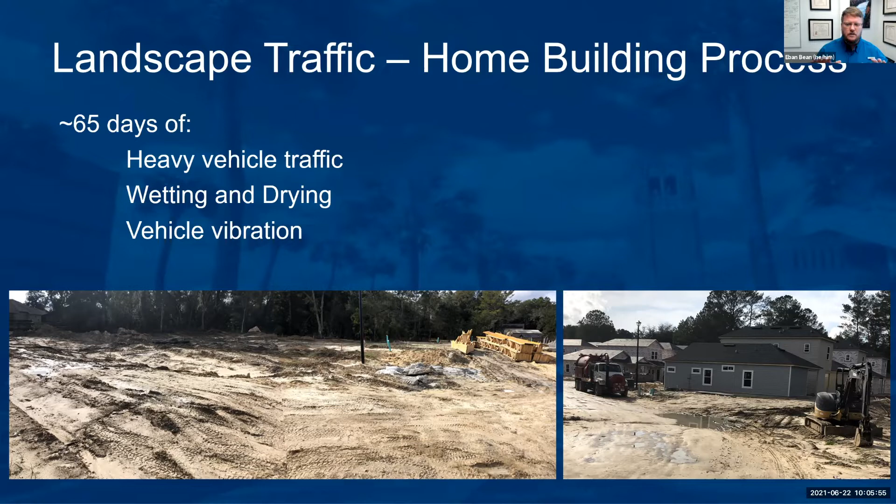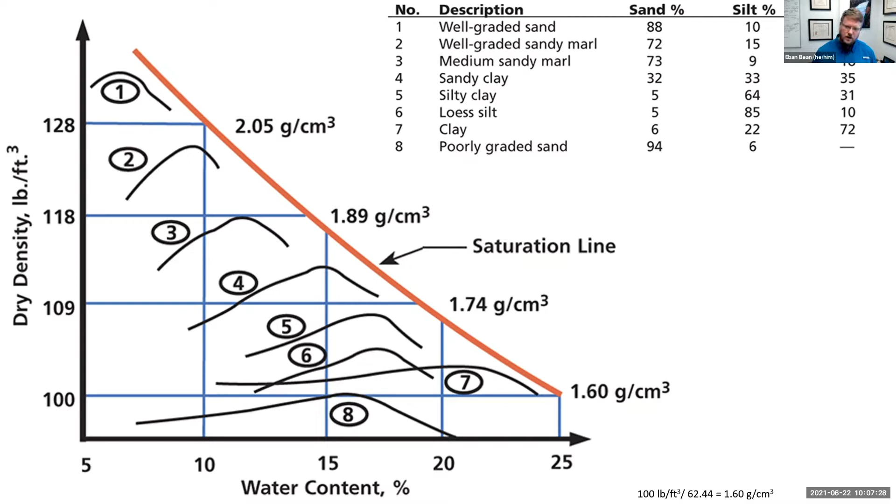any further. So if we wanted to optimize the compaction, we would want to wet and dry, and load and unload this, basically put a compaction force on it as it's going through this wetting and drying cycle. This is essentially what's happening in our landscapes, but it's also what you want to do if you wanted to stabilize a roadbed or do a structural foundation. But it's not the best for trying to grow vegetation in landscape.

So with soil compaction, there's a couple of processes that are affected. Number one, we have less infiltration. When we compress those particles together, we reduce the amount of space in between those particles that water can infiltrate the soil, and that air can move through the soil. So it makes it a lot slower for water to soak into the soil. This generates more runoff, and we've probably all seen the impacts of urban runoff, particularly with nutrients on our waterways here in Florida.

But it has other effects. Some of the main ones are how it directly affects the vegetation that's trying to establish in this soil. The roots of a plant will naturally push into that soil and then die back each year seasonally, and leave these old root channels that water and air can move through. And they'll put more roots down each year. So gradually over time, it will mitigate this soil compaction.

However, the soil can be so compact in many cases that it prevents the roots from actually penetrating into the soil and sinking those roots down. So we end up with a fairly shallow root zone, and you may have even seen the carpeting effect that occurs every once in a while. This vegetation is less drought tolerant, more sensitive to pests and other types of stress, and can't go as long without watering in between. It's more dependent on irrigation.

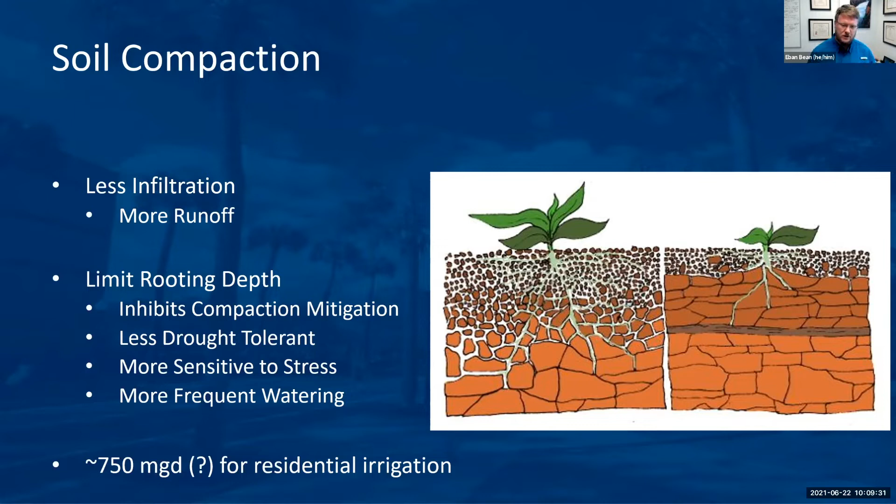In the state of Florida, we're talking somewhere around 750 million gallons per day go to residential irrigation. That's a lot of water each day. So one of the sites that we've worked in quite a bit is not too far from you in Hernando County. We're over in Marion County, at On Top of the World. A lot of the soils we're dealing with here are Candler fine sands, and I think that's pretty common in Hernando County as well. So a lot of what we have here at On Top of the World probably applies to what you have in Hernando County.

So this is an active adult community. They have about 6,000 homes currently, but a projected build out of about 30,000 homes. And they're within Swiftmud, the Southwest Florida Water Management District, just as you are. The average water usage is about 250 gallons per home per day. But On Top of the World wanted to be good stewards, reduce their water consumption, so they reduced their permit to 150 gallons per home per day.

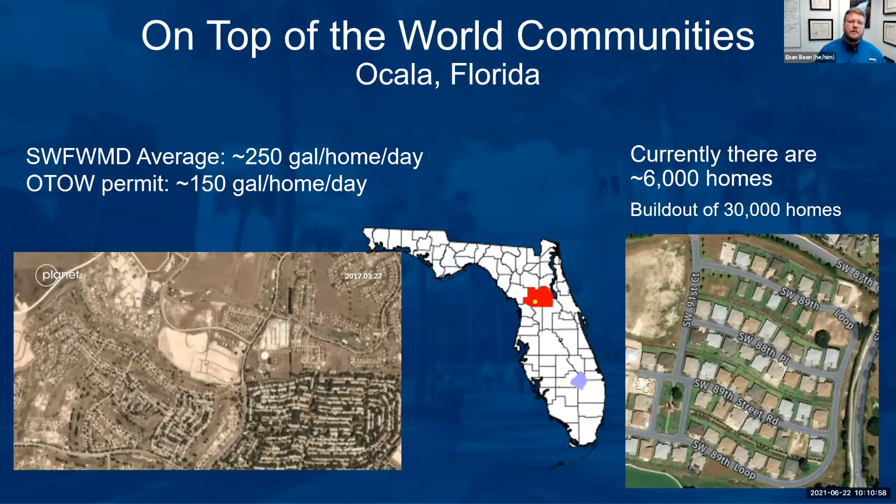They got down to about 190 gallons per home per day, and then brought us in to explore other ways they could conserve water. They had tapped out all the indoor efficiencies, and had gone with only 60% turf in the landscape, but still weren't hitting that 150 gallons per home per day. So this is the first study I want to walk you through real quick.

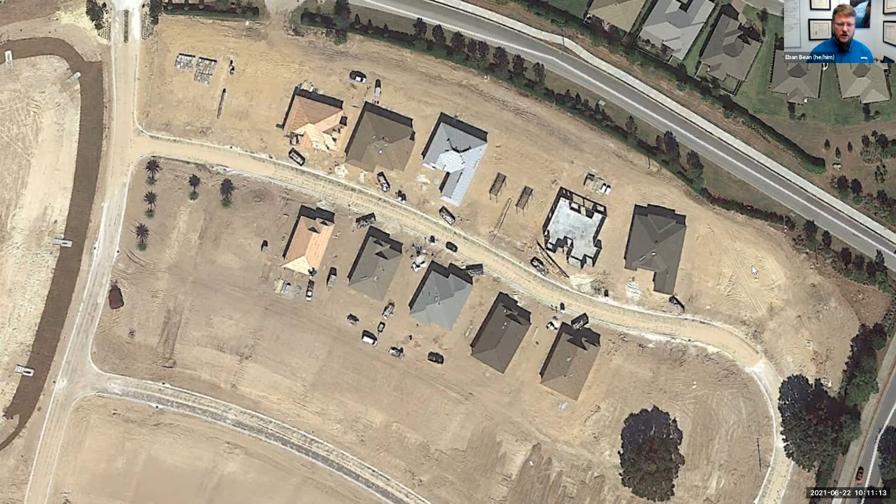This is 10 model homes that we have here, and this is the one that is not going to be included in the study. But essentially, we use 9 of those homes. In 3 of them, we left that soil compacted, just like it would be if a contractor came in, built the home, and then sodded it, just like any other home. In 3 of them, we took a product that you may be familiar with called Comand.

It's an organic compost, and we put down about an inch depth, and then incorporated that into the top 6 inches. This was just before the irrigation lines went in, and the day before they laid down the sod and put in the landscaping. In this case, we used Empire Zoysia, and in some other studies I'll show you, we're using St. Augustine. So just know we're looking at several different types of turf here.

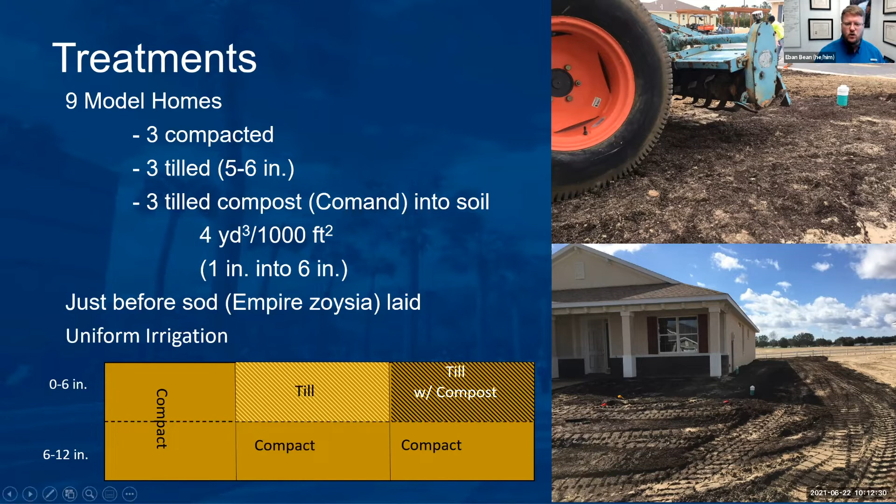And then we also wanted to know, looking at how the soils improve, what kind of benefit we got from just tilling the soil. So if we didn't include the compost, we didn't have to manage another material on site. If we can just get away with tilling the soil, that would be a real benefit to getting this to translate into practice. So we basically incorporated into the top 6 inches of that soil on 3 of the homes and so forth.

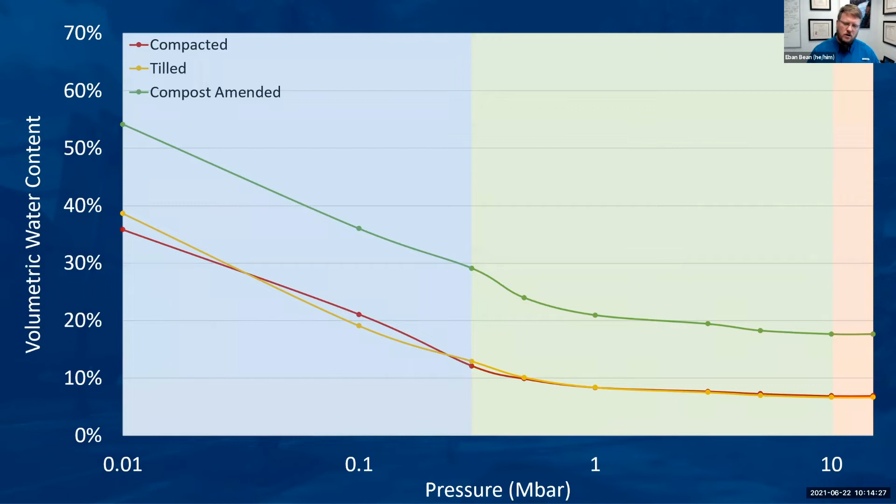At the other end, if you tried to squeeze all that water out, you're going to get most of it out, but there's some amount of water that you can't squeeze out of the sponge. Similarly, there's an amount of water that plants just can't pull out of the soil. This is unavailable to the plant, so this is our permanent wilting point. But what's available to the plant for a longer period is what is in this green zone. I'm going to show it to you more in percentages or fractions of the volumes here.

The key that we found several times throughout this 2-year study was that the control compacted soil and the tilled soil essentially had the same physical properties. The way they held water and interacted with water didn't really change. I was a little surprised by this, but sand doesn't really hold a lot of structure. A clay, you can form and mold, it'll hold structure. So when you till that sand up, put sod on it, water it down, and give it a little bit of time, it's going to eventually settle back down and recompact to its pre-compact state.

Well, by incorporating the compost, what we found is that it holds that structure better, incorporates a lot more porosity or volume for water and air to exchange through the soil, and was able to hold twice as much water as the unamended soils.

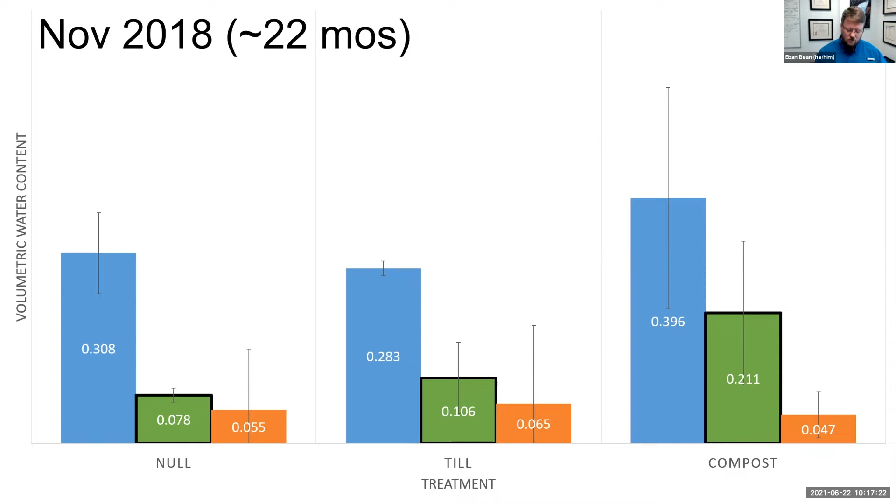Keep in mind, this is a model home area of a development. It's just like the real world without homeowners. It's my favorite research site that I've ever had. But basically, I didn't want to do anything that would stress the grass or cause the lawns to fail. All right, so with this doubling of the plant available water, hopefully you can pick out which ones are the amended lots.

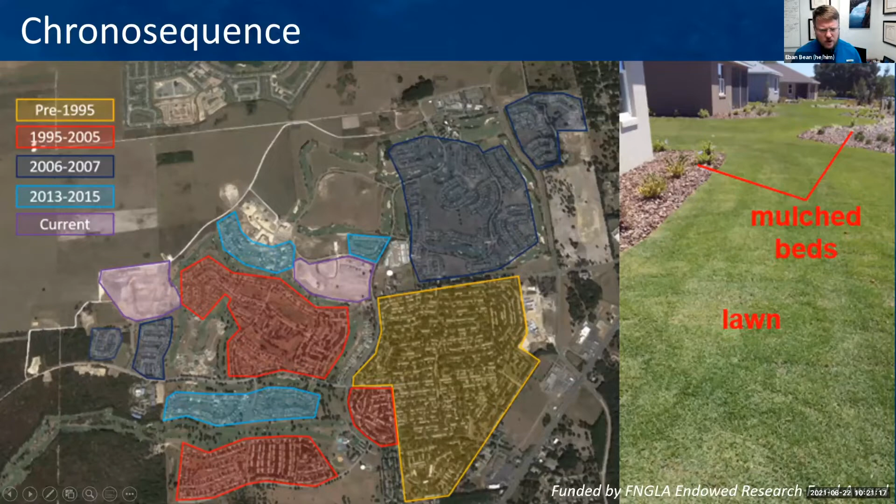And we looked at the soil characteristics, several of them in the mulch bed and the lawns. And it was really interesting what we were able to see. And I'm just going to show you the bulk density here, because there was a lot of data, but I want to move on and hit some other things. First of all, you see that we have the beds and the lawns.

So it's interesting that it takes 30 years of vegetation loosening that soil and developing that soil. But we do get back to a quasi pre-compacted soil bulk density, at least in the top 6 inches. But a couple of things as well to point out. Number one, our 6 to 12 inches stays pretty high. And it takes several decades to really mitigate this on its own.

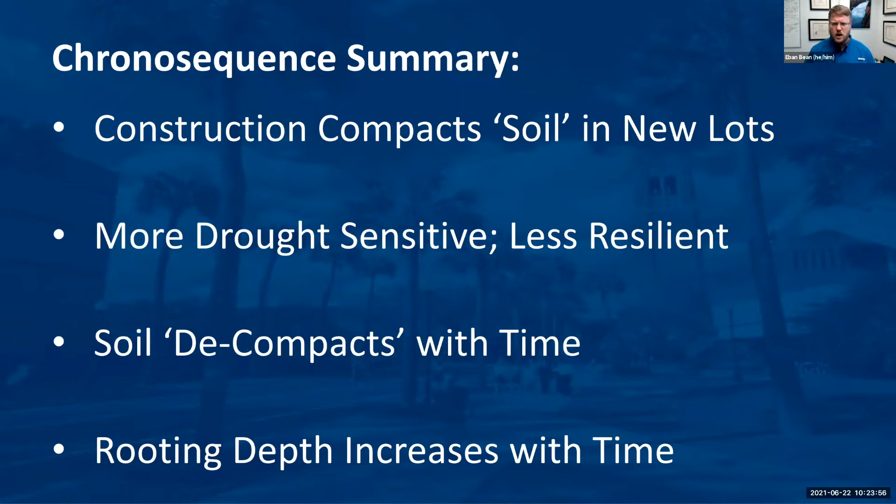We do get this compaction mitigation process that occurs over time, and the rooting depth does increase with time. So we also looked at how far we could push down a probe at different age soils. It does increase over time, but the time frame for these processes to occur is on the order of 2 to 3 decades. Okay, so a long time for that to establish.

All right, so we had some good results from there, and this set the stage to look at, okay, how is this actually going to work in the real world with soil amendments and compost? With the model homes, we didn't have homeowners to come in and do things the way they want to and change things. So in this phase of the study, we looked at a real world scenario. And so we had 24 homes.

7 of them were compost amended, same type of application, basically 1 inch into the top 6 inches, or 4 cubic yards per 1,000 square feet. And we had 8 sites that were tilled down to 6 inches, no compost, and then 9 that were controls, basically left compacted. And then we applied these treatments just before the landscaping went in, just before the irrigation went in. And then we started monitoring this in July of 2018 through October of 2020.

One thing I want to mention, though, is that each of these homes had a Hydrawise irrigation controller. What we asked each of the homeowners to do at the beginning of this study was to reduce their irrigation runtimes by 25%. They were pretty standard, basically all set at 45 minutes for their lawn irrigation. Reducing it by 25% took it down to, I believe, somewhere in that 33 to 35 minute runtime, with the caveat that they could at any point return to their full runtime if they thought their turfgrass needed it.

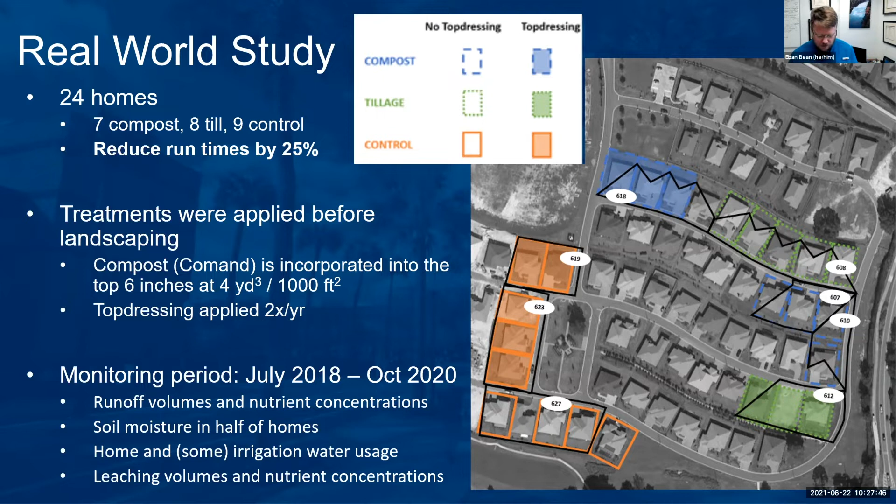We also collected leaching volumes and nutrient concentrations. So if we pair this with the runoff, this is really getting at, okay, we incorporate compost into the soil. Compost is sort of the very first slow release fertilizer, if you think about it. So we are incorporating nutrients and introducing those in the landscape. Are we having an unintended consequence of amending those soils by potentially releasing nutrients into runoff or into leachate? So we wanted to look at that as well.

So looking at the summary over 2 years, what did we see from homeowners with the changes to their irrigation? Keep in mind, we asked them to reduce their runtime by 25%, so to drop down to 75% of the initial runtime. In the control or the compacted lots, we had 6 homes that we had data on. 3 of them stayed at the 75% runtime. 1 returned their home's runtime back to 100%, and 2 increased the runtime above 100%, or above the 45-minute runtime for their lawns.

With the tilled lots, we did see a little bit of a benefit. 2 actually decreased their runtimes below 75%, so below 33 minutes. 2 stayed at the 25% reduction, and then 1 returned it back to the 45-minute, 100% runtime. But with the compost amended soils, we had 3 that decreased their irrigation by about 55%, so down to around 20 minutes of runtime. And there was only 1 lot that returned their irrigation back to 100%.

And there's some people out there, the old adage is you can lead a horse to water, but you can't make him drink. This guy, great guy, but he wanted to have the best looking lawn. So he was going to use all the water that he was allowed or recommended to use. And none of these homeowners knew what kind of soil they had or what their role was in the study.

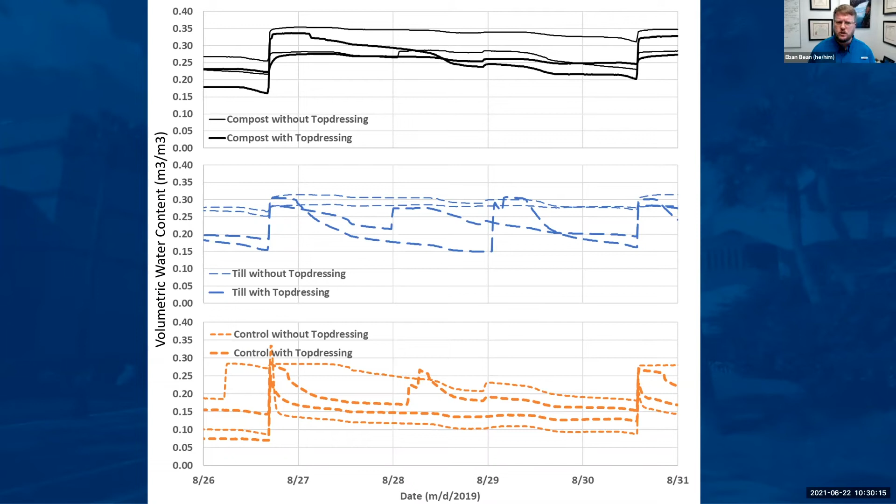What I'm showing you here is the soil moisture over time, and I want to show some differences that we see with the composted soils, the tilled, and the control or compacted. What you should see up here is that our composted soils stay high after this rain event. All of the soil moisture sensors tick up at the same time. This is not staggered like irrigation would be, so this is indicative of a rain event. It saturated the soils, and it holds on to that water for a pretty long time.

We did see that 2 of the tilled lots actually did as well, but they weren't the ones getting top dressing. And I haven't mentioned much about top dressing in this study because it was inconclusive. So we don't have great data that supports what the expected benefits of top dressing can be from a water conservation perspective yet.

And then we have the controls here, and what you see with most of these soils is it goes up really quickly and then it drops down really quickly. Again, not holding on to much of that water, it's just kind of draining through if it's getting into that soil, and it's going back down to that baseline pretty quickly.

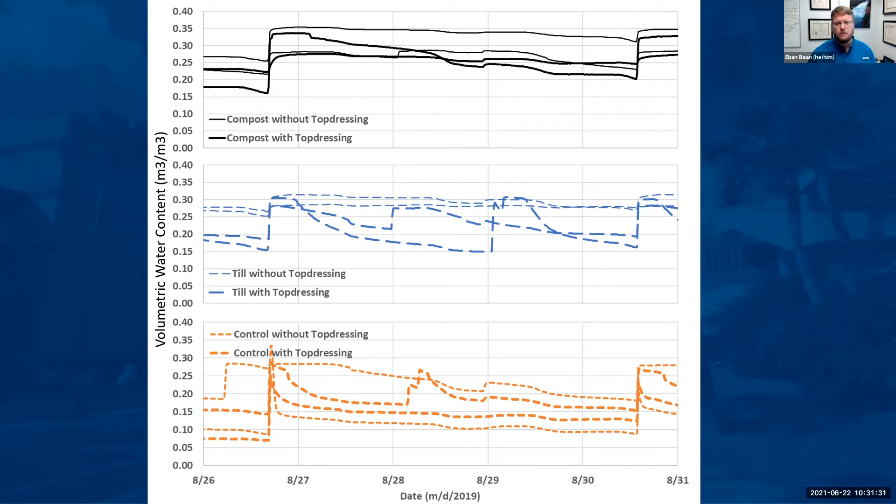All right. So we can even see statistically that our compost had significantly greater water content than our tilled, which was significantly greater than our control. What was sort of strange, and we haven't really figured this out, is that our top dressing, which was basically putting down half a cubic yard twice per year, those lots actually had a lower volumetric water content, slightly, but significantly, than our not top dressed lawns.

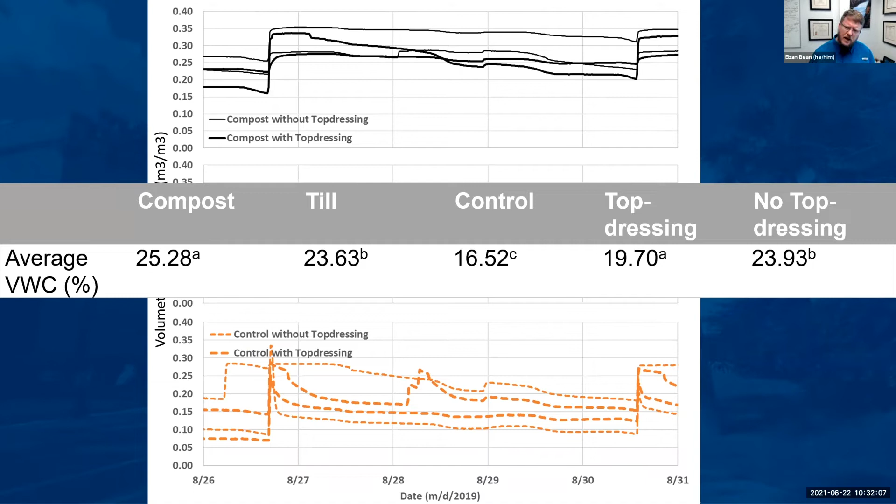Okay, now nitrogen leaching. So this is somewhat interesting. Some of it we don't have a real good feel on. But what I want to start out with is this is looking at basically the total loading of nitrogen that's coming out of the root zone and would end up in the groundwater. In the Springs area, we're particularly interested in trying to reduce that and limit the amount of nitrogen going into that.

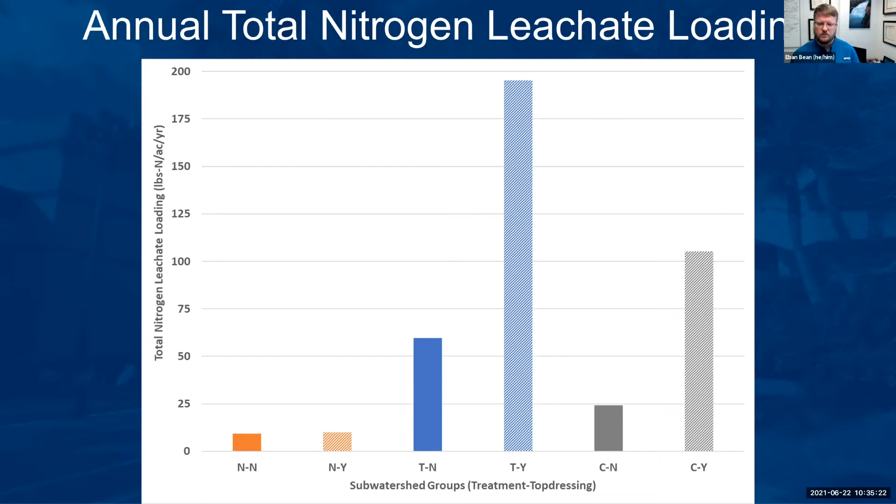Sort of interesting that our tilled had higher loadings than our compost, but we think this is maybe due to just more retention of the nutrients available in the compost amended soil, whereas the tilled soil basically allowed those to flush out. So compost was significantly greater than the compacted soils. So what does this mean? Well, a couple things here.

With runoff, we basically had no significant differences in concentrations or loadings. There were actually lower runoff volumes from the compost amended soils. So there could be some potential crediting or benefit to reducing runoff by amending soils. In the root zone, the composted soil had a higher water availability.

And the homeowners that had this soil actually reduced their irrigation by about 55%, more than what we recommended to them. They reduced it on their own. And even with these reductions from the compost amended lots, we still saw that there was no significant difference in nutrient concentrations, but there was significantly higher nitrogen loading from the compost amended soils.

So this means that this is volume driven because concentrations aren't changing, but the volume is greater from the composted soils. So what that suggests is that even at 25% or 55%, we may be able to reduce the irrigation even further when we have amended the soils.

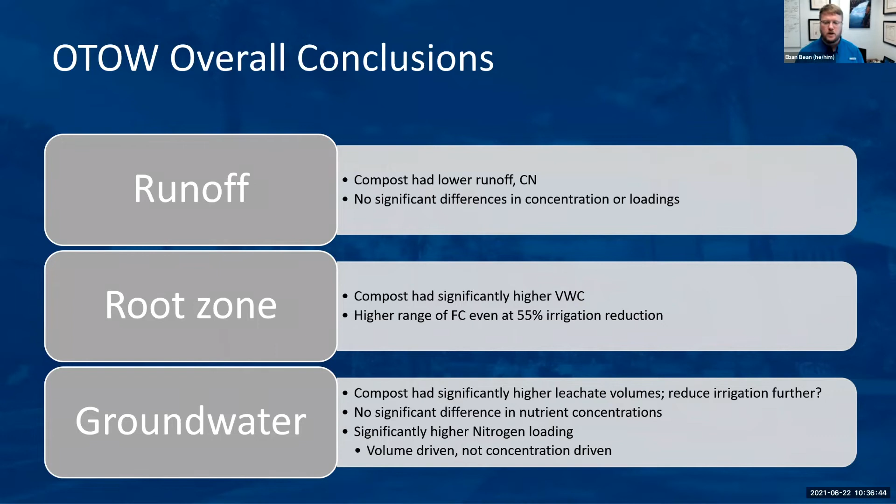So coming out of this study, we still had some remaining questions. One of the main ones here is how much can we actually reduce the irrigation by? Coming out of that homeowner study, 25% reduction seems pretty conservative. The homeowners were happy with their lawns. Several of them pushed it to 55% reduction, and even that seemed to be, from a groundwater perspective, we ought to be able to reduce it even further.

So how much compost is needed to realize these benefits? Right now, the recommended application rate is 4 cubic yards per 1,000 square feet. But what if we reduce that amount to 2 or 1 cubic yard per 1,000 square feet? That would reduce the amount of nutrients that we're introducing that are a part of the compost. So maybe that's something we should look at.

And then, we've done a lot of work with one particular product, and that's been the Command product. Life Soils is a great partner to work with, but as IFAS, I strongly believe that we should be brand agnostic, or basically not endorse any particular product. Our recommendations should be descriptive, meaning we say if the product has these parameters or these qualities, then it should produce this outcome. Do the different brands or different materials produce different results?

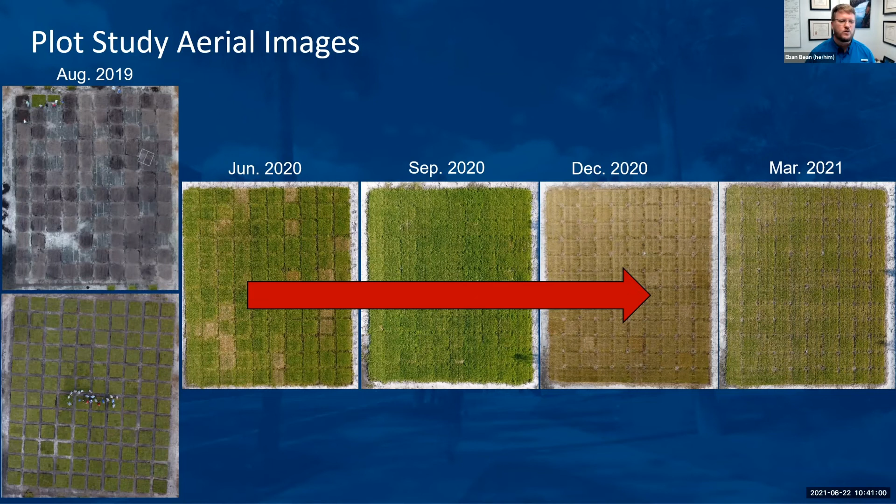So this is the study that we did. We have 2 studies that we looked at here. I'm going to go through this pretty quickly because I just want to get to what the results were here.

But essentially what we wanted to look at here were 3 irrigation rates. Okay, so we used 75% of the IFAS recommendation, the same as that 25% reduction. We used 25% of the IFAS recommendation, which is 75%, and then 50% of the irrigation rate, and then a 0. We had some plots that were not irrigated.

4 amendment treatments. We had a control, and then 3 commercially available products that we just labeled A, B, and C. And then all of these plots were at the high application rate of 4 cubic yards per 1,000 square feet, 4 replicates.

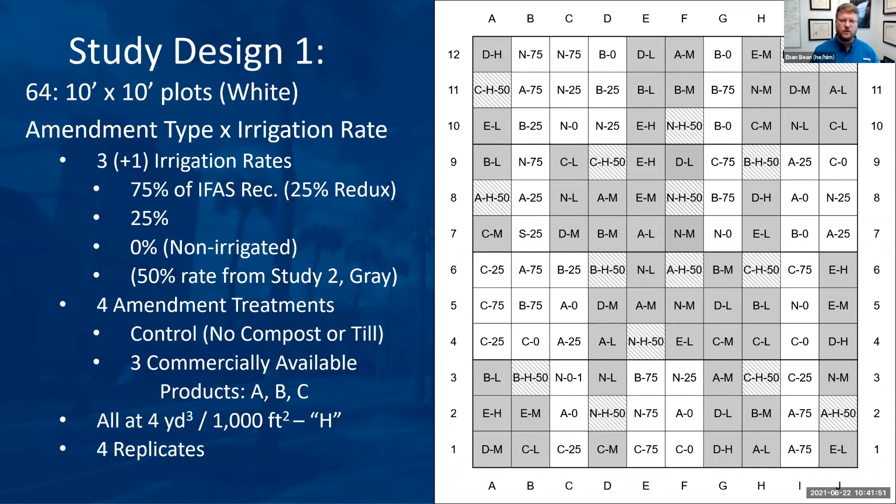So looking at this part of the study, we wanted to collect soil samples and look at different soil characteristics at the beginning and ending of each growing season. What I have today is basically the summary of results from the beginning and ending of the first growing season. We've collected the beginning of the second growing season, but obviously we haven't gone through the full analysis of that, and we haven't gotten to the end of it by any means.

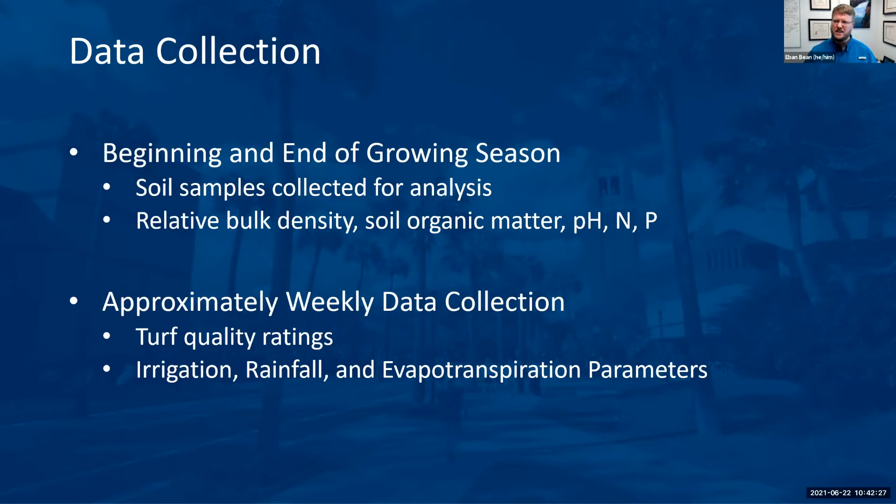In this study, the NTEP, the National Turfgrass Evaluation Program, recommends a 6 as the minimally acceptable. In this study, we went to a 5, just saying that maybe our homeowners, depending on where they're at, may just be a little bit more able to tolerate a little bit lower quality, but we'll see.

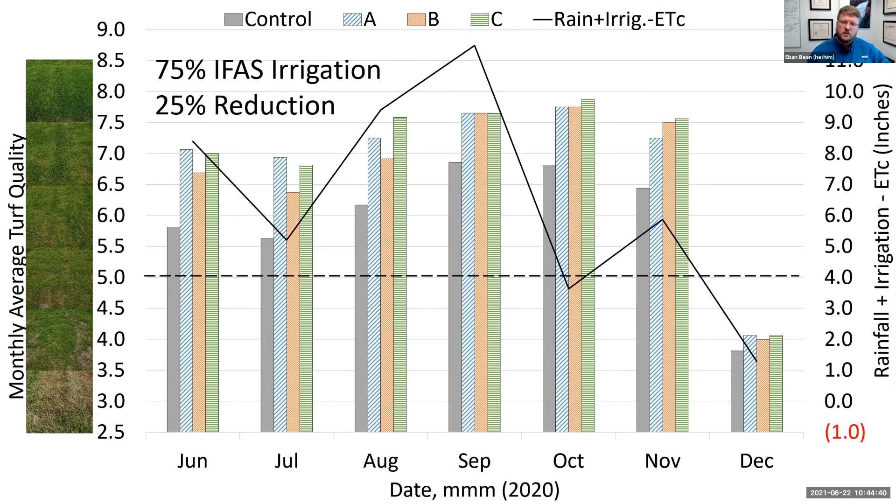Now we're going to half or 50% reduction. And so our turf quality ratings kind of drop down a little bit. What you'll notice though is there's not a whole lot of difference. There's a little bit of difference, about a half a point between the different amendment types. And these are commonly available compost brands. You could probably come up with what these are, or at least some ideas of what they would be.

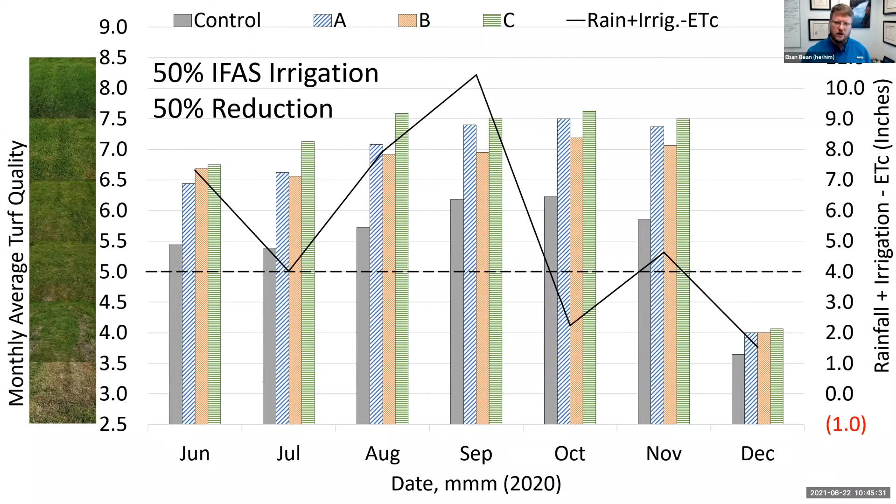Our amendments, again, we're still hanging out about a point and a half higher than the controls, and we see that we basically maintained everything above that acceptable 5 value during the season. And you're going to see this black line of the water balance tick down as we reduce the irrigation further. Getting down, this is 75% reduction in the irrigation.

Okay, and so here we're down to about maybe now half to 3/4 of a point greater than our control plots. Here we're getting much less of a difference because we've got so much rain making up for it.

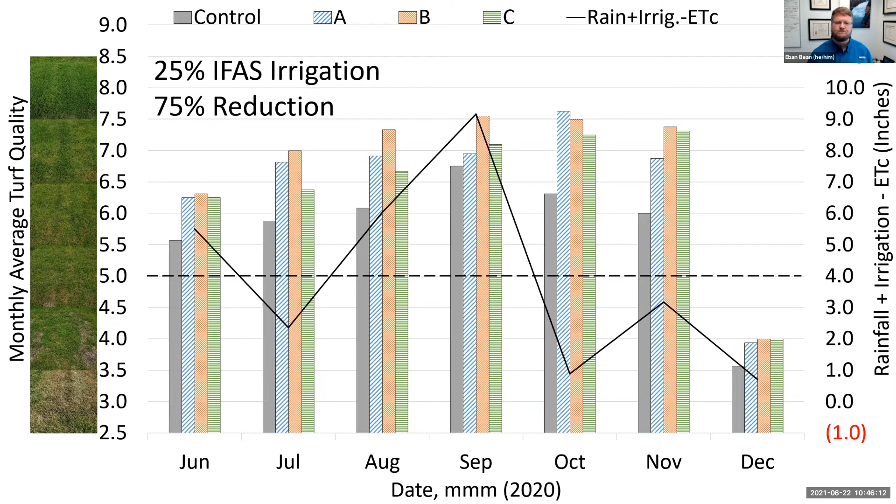And then in October, when we have the reduction in rainfall, we sort of see that separation, that the control or unamended soil kind of responds where it drops off quicker, whereas the other amended soils kind of stay higher for longer. Okay, but still everything's above that 5.

Now, when we get to the non-irrigated plots, this is where we really kind of tripped, went into too stressful of a situation. Each of these stars indicates how many plots would basically have failed during the month. We had to basically put these on recovery irrigation to bring them back to health.

And if you'll notice, each one of our amendments at 4 cubic yards per 1,000 square feet without irrigation basically would have failed, at least one replicate would have failed in each of those treatments, during the time frame from June to September.

Interestingly, once we got through September and October, things were kind of able to hang on. And I think that's because our ET dropped off. It wasn't as hot, and we were able to maybe benefit from some wetness in September. But I don't think that non-irrigated is going to be a plausible or a real good, we're not there yet, let's put it that way.

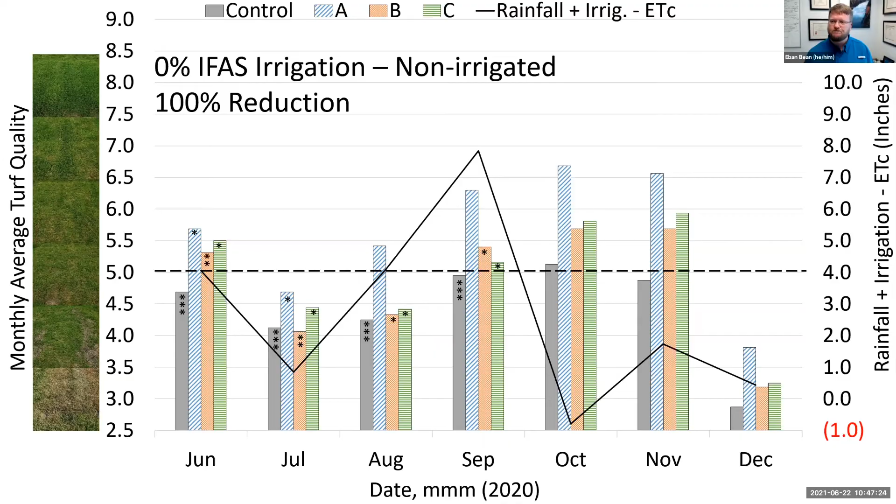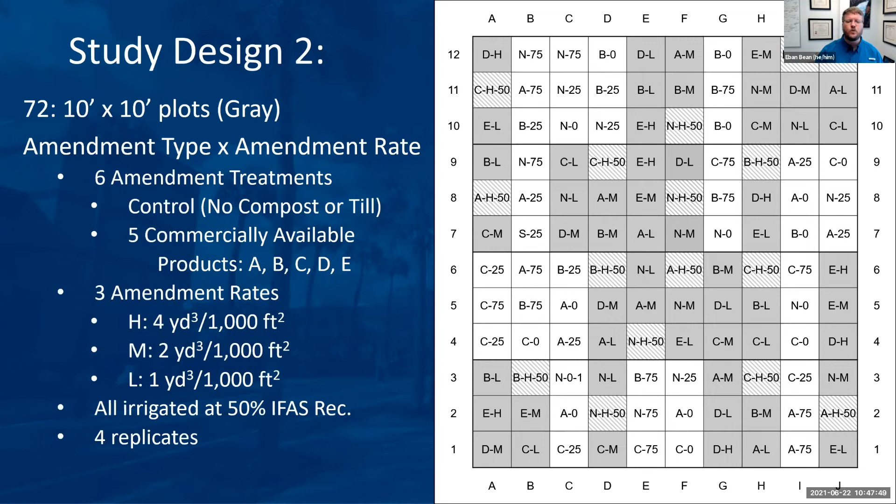The second design, I'm just going to go through really quickly because the results are fairly general. Here we were looking at different amendment rates, high, medium, and low, 4, 2, and 1 cubic yard. And here we used 6 amendment types. So 5 commercially available products, the same A, B, and C, and then we added in a D and an E along with the controls. 4 replicates, and all of these were irrigated at the 50% IFAS recommendation.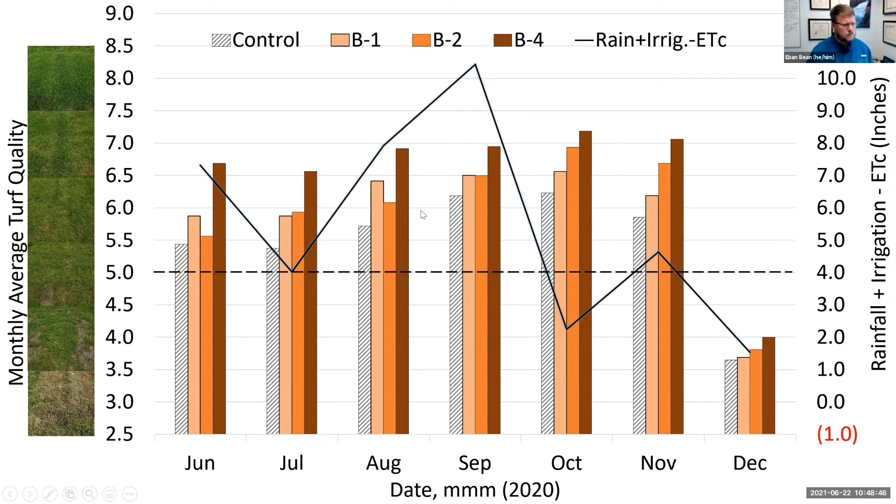Similar here, we see some variation where in some cases, for whatever reason, the 2 cubic yards is slightly lower than the 1 cubic yard. But essentially, we see diminishing returns as you increase the compost. Same thing for C. Again, in this instance, the 2 cubic yards was slightly lower than the 1 cubic yard, and in a couple of these other cases. But essentially, what that means is that there's no significant difference.

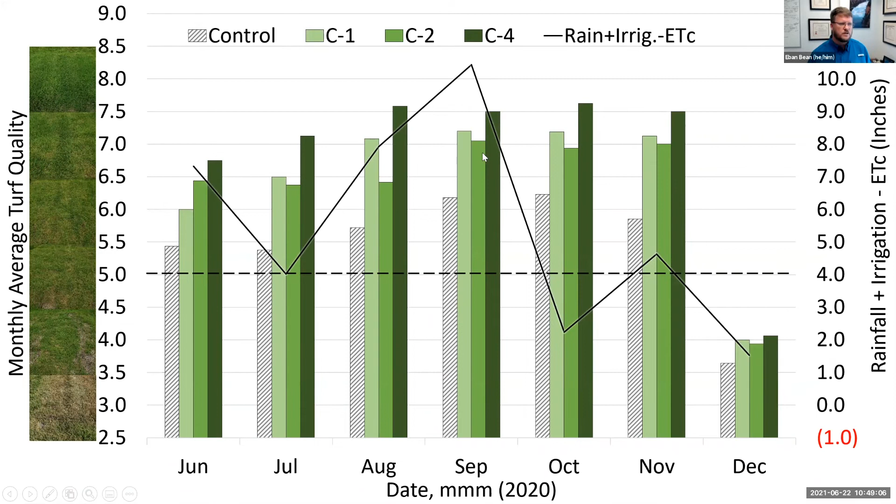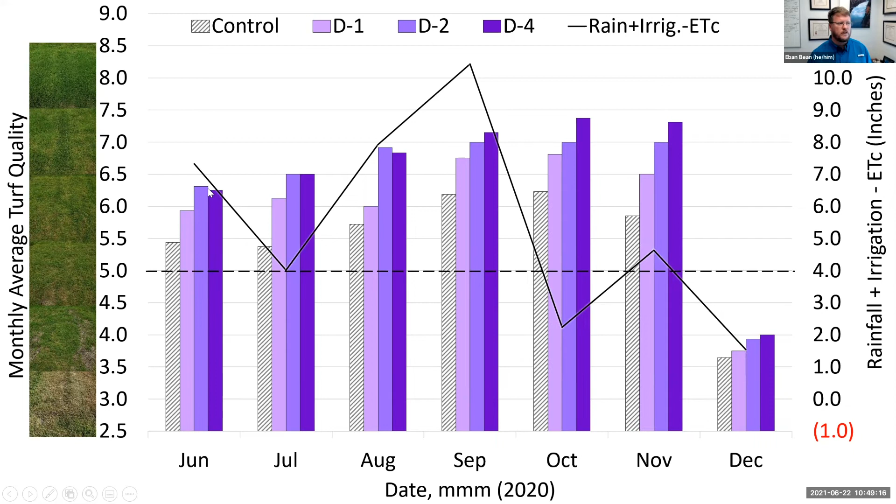Same thing with D, a little bit more predictable. We have a slight increase from controls to 1 cubic yard and then the 2 cubic yards. But once you get to 4, diminishing returns again. Same thing with E.

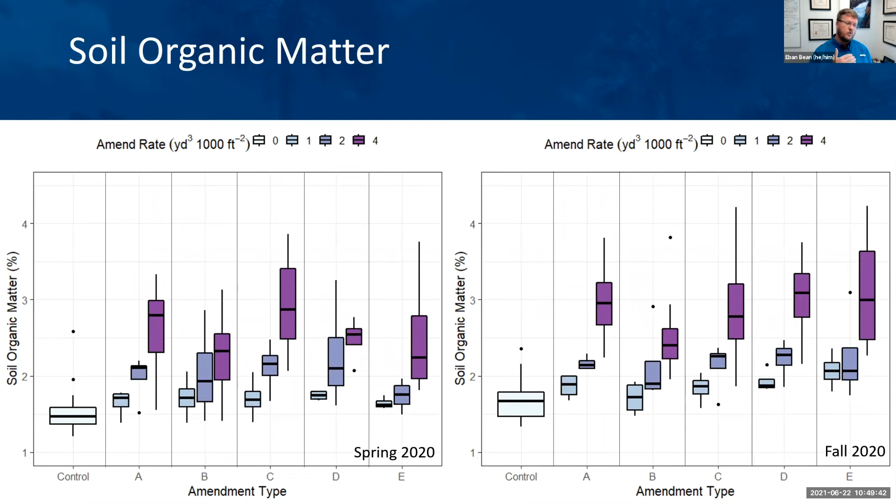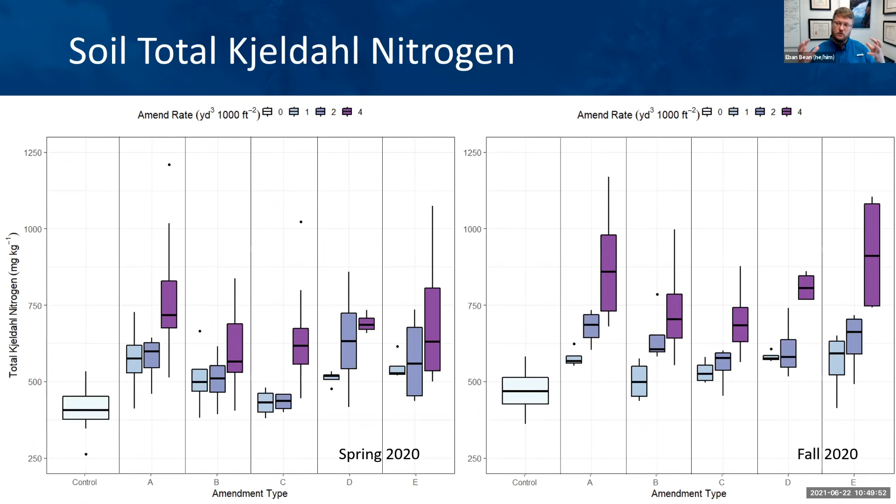So running short on time, I'm going to skip through some of these soil properties, but essentially what we saw is that bulk density decreased as we increased the amendment. Soil organic matter increased as we increased the amount of amendment that we applied. Nitrogen in the soil actually increased from the spring to the fall, so it's able to retain more nitrogen, which was good. Same with phosphorus. It actually bound up more phosphorus in the soil.

So to summarize some of this work, number one is these plot studies are just one growing season. Really promising results and really positive for what we can maybe push out into the landscapes. The second year of that study, we're kind of in the middle of that. In general, we're not seeing significant differences among common compost products.

One thing that I will say is that all of our products were commercially available and certified by the U.S. Composting Council. So my recommendation for now is that if you're using a product that has that U.S. Composting Council certification, the Seal of Testing Assurance, then I would expect that you're going to have the same benefits as if you used any other approved product.

More is better for some of our parameters, but in general, 1 to 2 cubic yards seem to be performing fairly similarly, and we may not need to be still recommending 4 cubic yards. And it seems like right now, a 50 to 75% reduction in irrigation may be possible with incorporating compost.

I want to point you to a couple of things. We have a guidance document that we developed, really intended for the development industry and the landscaping industry, basically a how-to on amending soils in new residential landscapes.

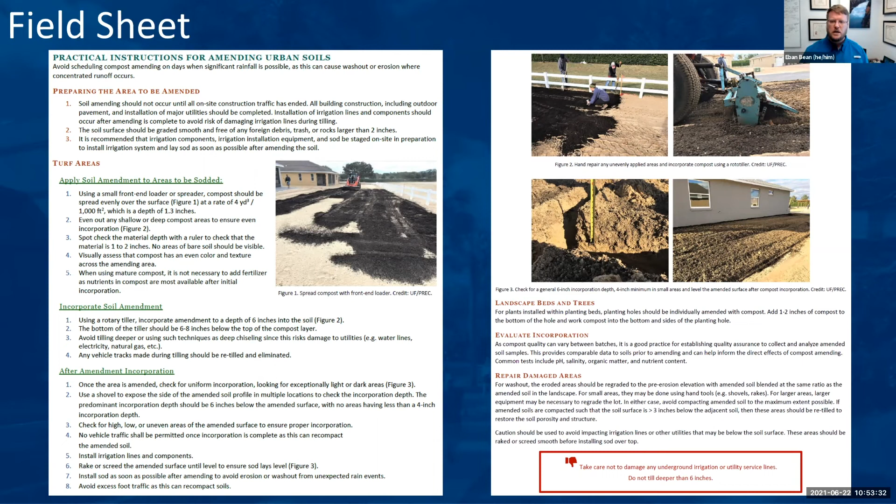We also include a field sheet that walks you through what the steps are for basically anybody that's going to do this. So I would say, for example, if you have a turf lot or a landscape that has failed and you're looking at replacing it, I would highly recommend having your soil amended and then putting down the sod. It's an investment that, in my opinion, and we're working on ways to get those numbers, will pay for itself eventually. It's also available here on the FDEP website. I can put that link in the chat at the end here, if you'd like to pull that up and take a look.

And the last thing I'll mention is we've been working with the UF Law School, the Conservation Law Clinic, to develop an example ordinance for how local governments might implement a requirement for amending soils, just because the way that development is being done, the soil compaction, the poor quality of soil or material that's brought in, it just leads to so many issues. Lots of excess water that doesn't need to be applied, a lot of pest issues as well because of the conditions that are developing in the landscape. And we did basically a nationwide review of some ordinances to come up with this.

We have an EDIS document that walks the local government through each of the sections that are shown here, giving guidance on how they might tweak or adapt it to their local government or local situation. And hopefully that will be approved for publication in the next month or so. It's currently being reviewed by UF faculty.